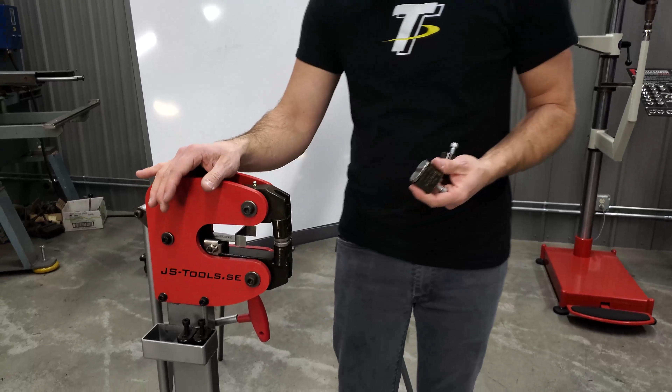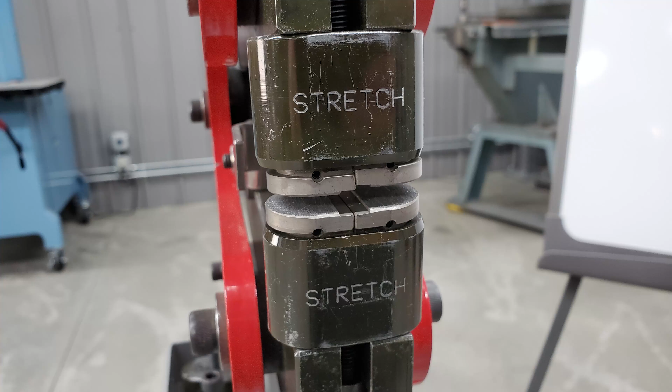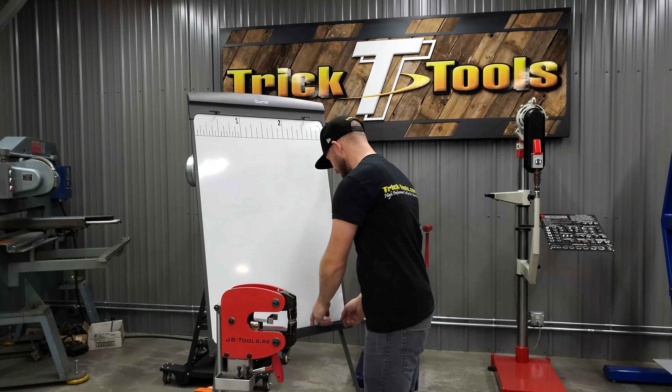So when you push on the foot pedal, it forces these two jaws together, and then the force of those jaws pressed onto the sheet metal that would go in between causes the jaws themselves to do whatever action they were built to do. So on a stretch jaw, I'm going to draw this on the whiteboard so you guys can see it with a little more definition.

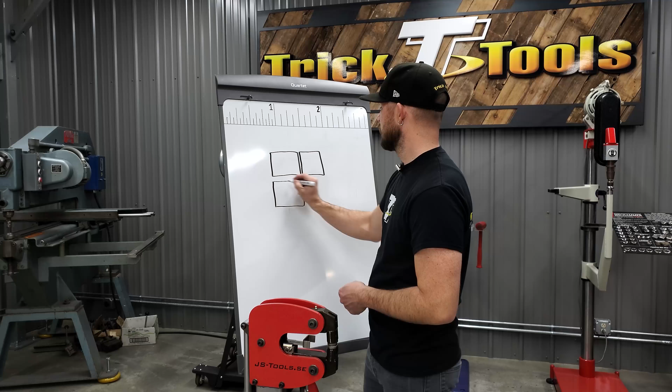So if you have, let's just say your jaw plates crudely look like this. So that's your upper jaw, and then you have a lower jaw here. Just drawing this crudely to get the point across. So on a stretching jaw, you don't really have a gap here - the jaw plates are together, side by side, on both top and bottom.

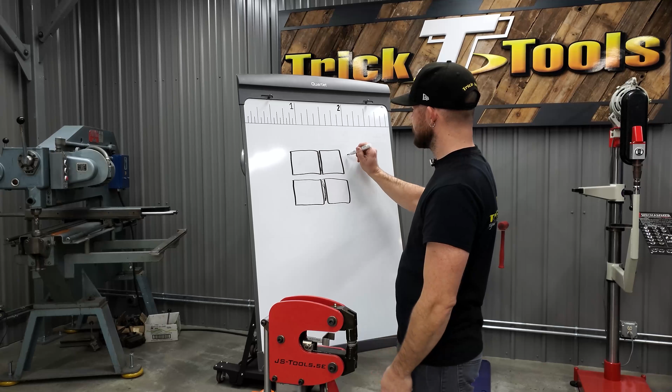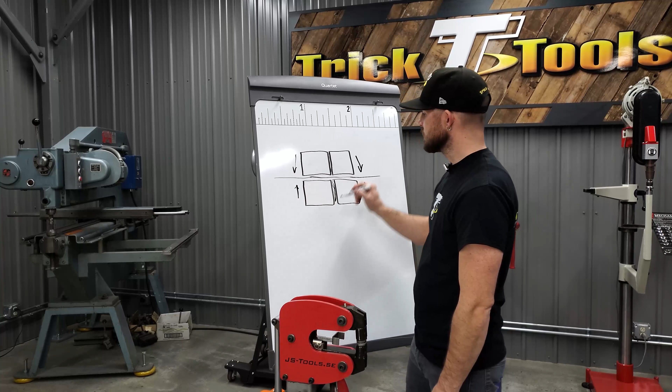And then as the jaws move up and down, you get the jaws coming together, and as they touch across here with the sheet metal, the way the jaws are made - and this doesn't matter based on what machine you have, this is pretty standard across the board.

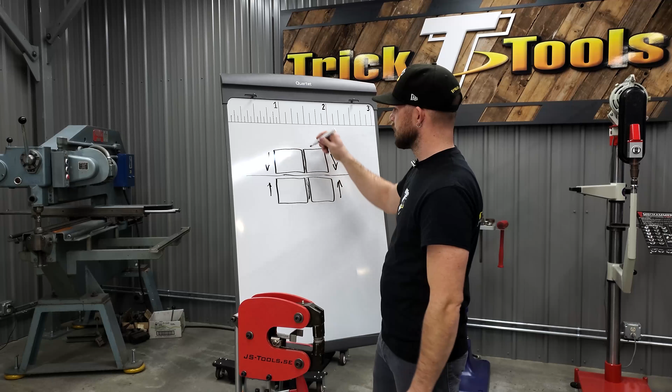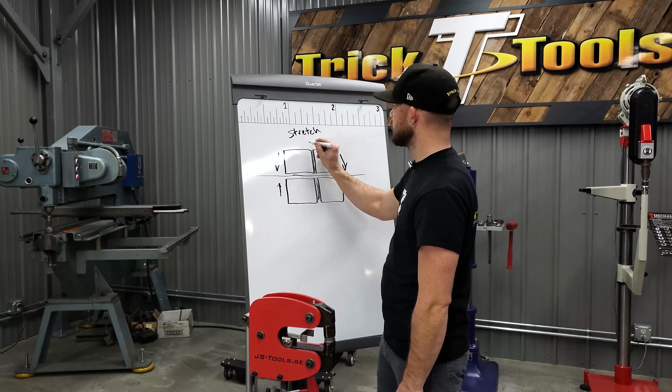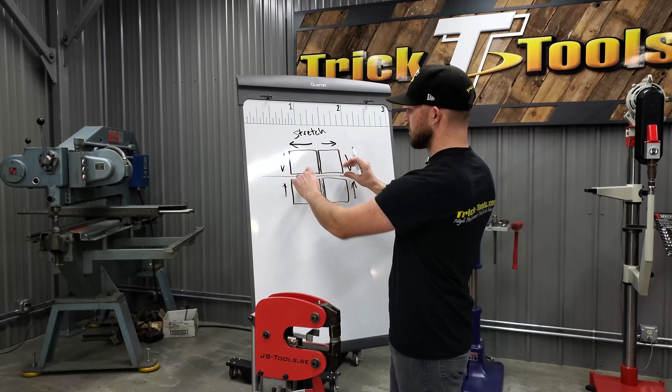These jaw plates internally are made to where when these come together, it forces on a stretching jaw - it forces each one of these jaw plates apart in this direction. So as they come down and pressure is applied in this direction, the jaw plates on both top and bottom are forced apart. And so what you have on your individual jaws - now this part can vary based on what machine you have.

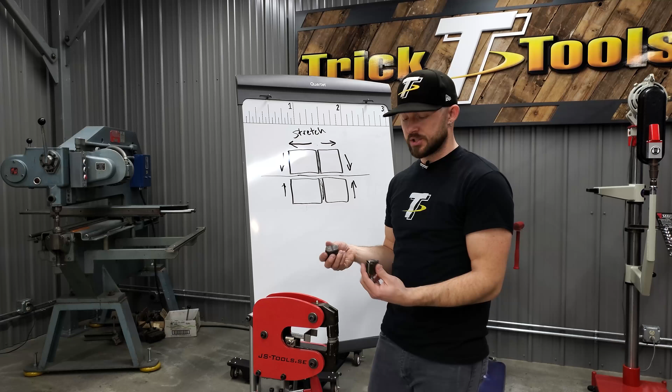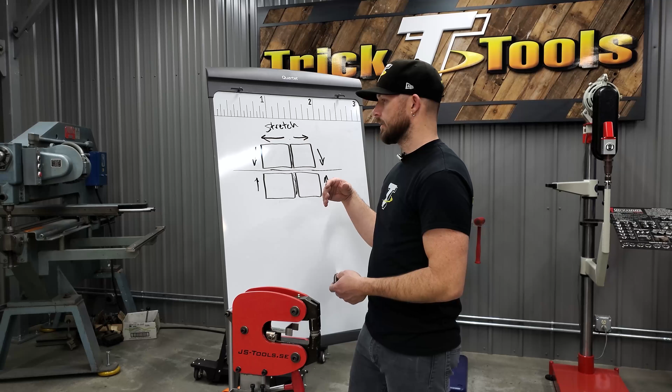So on this JS Tools machine, there's a certain type of texture or serration on the faces of each jaw. Different machines, different brands, all have different teeth marks or texture marks on the faces of the jaw so that when the pressure is applied, those grab the metal.

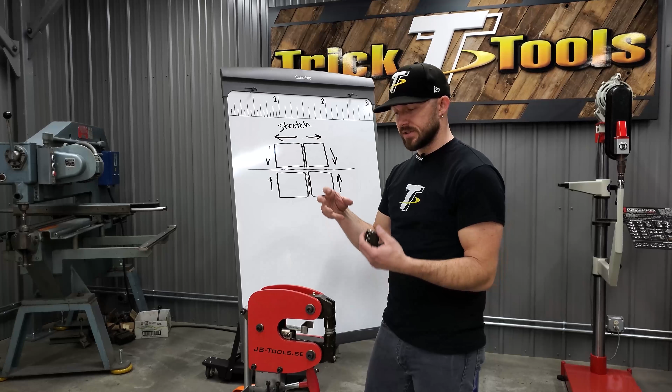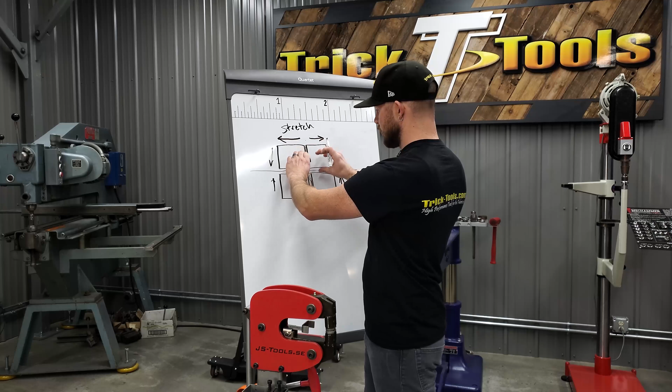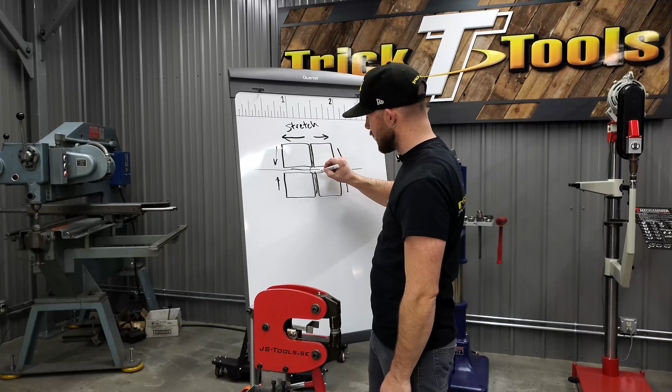And so as it grabs the metal, it pulls it. As it forces apart, it comes down, grabs the metal, and then it's forced apart, which then - on a stretch jaw, it is actually in this area right here where your four jaw plates come together. It's grabbing that and it's stretching the metal in that location. So it's going to grab the metal and pull on it.

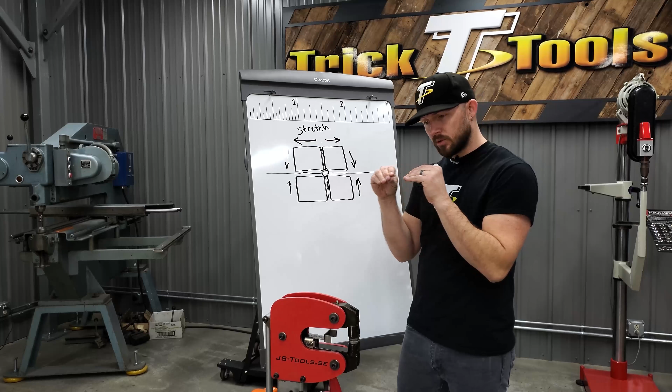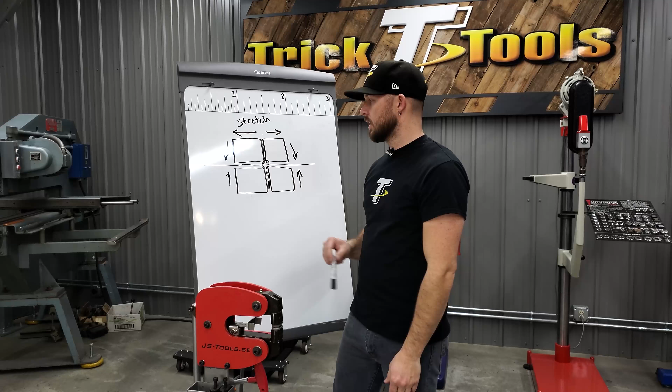So if you think of, let's just say you had some Play-Doh or some clay, something like that, and you rolled it out pretty flat, and then you grabbed it, even with your two hands, you just grabbed it like this and then pulled on it, and then you stretch it apart. That is essentially what is happening with this process here. So as opposed to hammering, where you're just providing an impact blow which smashes the metal down to create the stretch, this is physically grabbing the metal and stretching it to create that stretch.

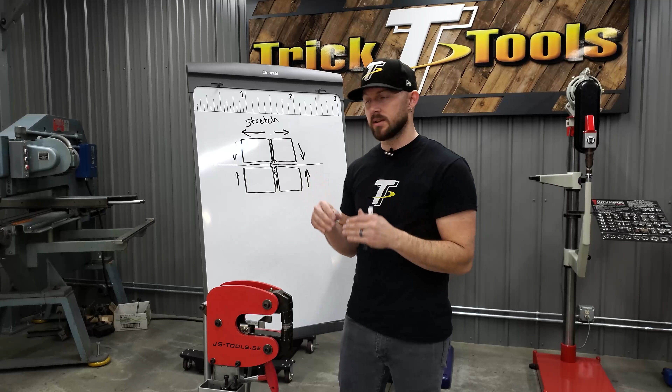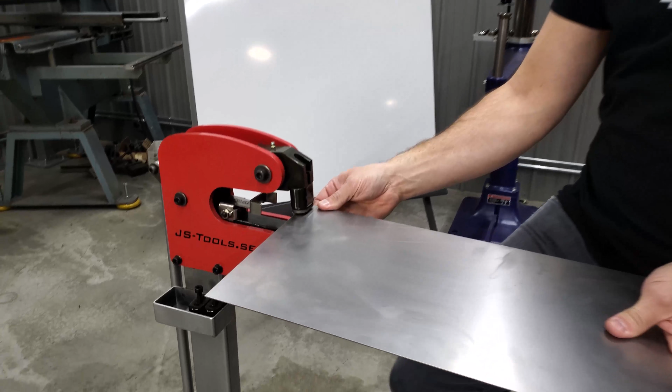So these stretch jaws in this JS machine here, like I said, to show you that if you put your piece of sheet metal in here, and as that comes together and you apply pressure down, the jaws come apart, and then you end up with a little bit of distortion in this corner now, and you can see where there's teeth marks here and here, and then there's an open space there.

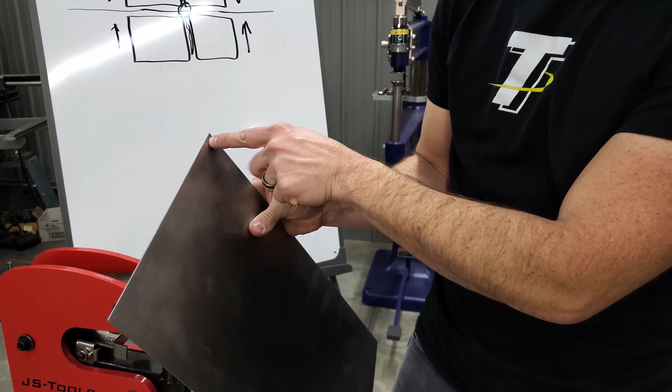So that's where the jaws came together, grabbed the metal, and they stretched it and pulled it apart. Now if you could measure this precisely, you would notice that the space in the middle, in between those marks where the jaws grab on both sides, is actually thinner than the material around it, just in that one spot.

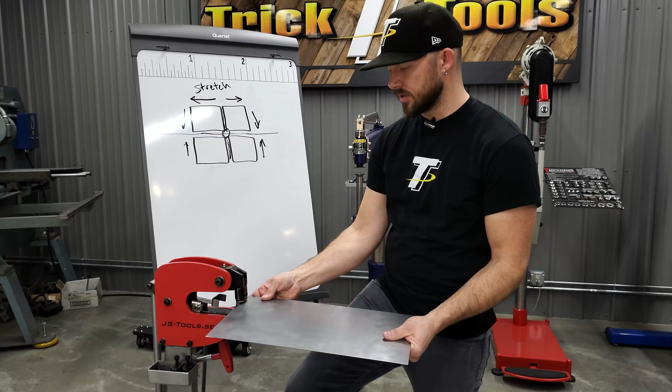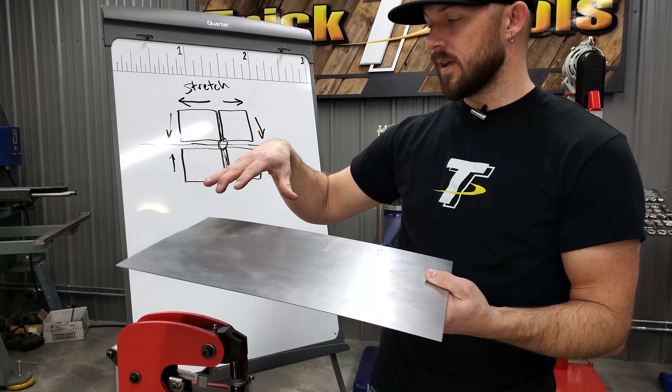And that's why as you go down the edge of a piece of sheet metal, and you do that a couple of times, then you really start to see some distortion, because whereas this was flat and in its natural state, now, because you've gone through and stretched down this edge, you've added more length of material in this distance, which in turn that material has to go somewhere.

So that's why you end up with little waves and stuff, because the material is trying to find a location that it's happy in and it's not loaded in any way.

So you can go down the edge of a piece of sheet metal, and you can also go in. So if you work your way in on a deep throat sheet machine like this JS, you can continue to walk the material in and then back out, and then you can actually see a line in the panel where it's grabbed and stretched apart down into the metal, and you have distortion deeper into the panel.

Now obviously the beauty of metalworking is learning how to use machines like this to learn where you need to apply stretch in order to achieve an outcome on a panel like this.

So now I'm going to explain the shrinking aspect of a shrinker stretcher machine and how it works. And so for starters, we'll draw this out.

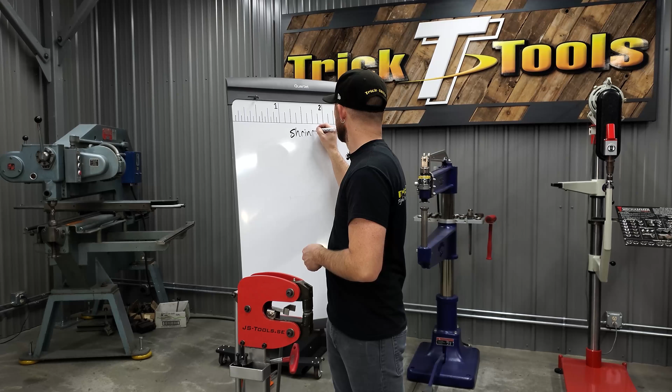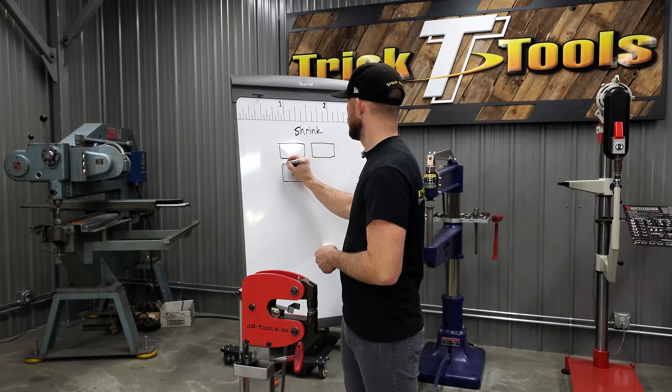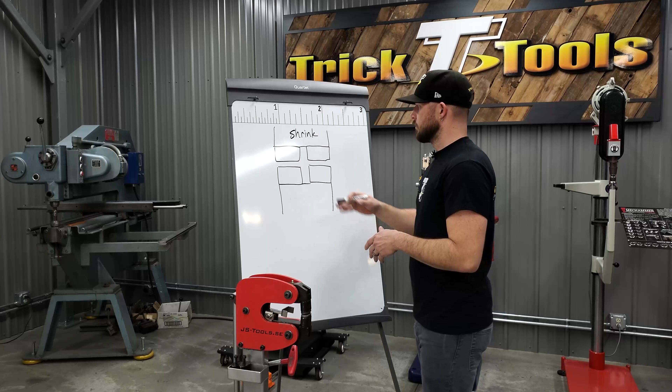So for shrinking, again, you have the jaw plates on your dies. Forgive my crude drawing, but you have your individual jaw plates that are on your jaws. Let's say this goes up this way, and so essentially with shrinking jaws, same principle.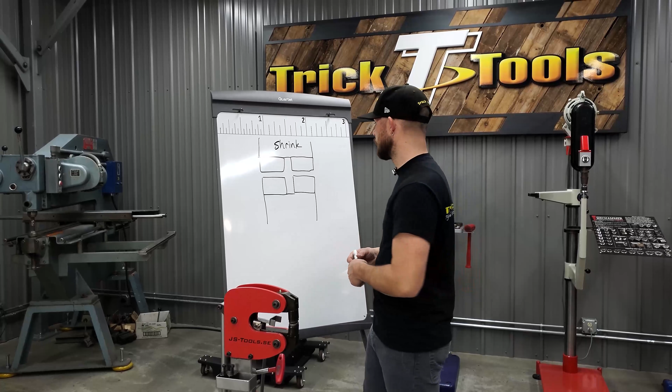Obviously the machine brings the jaws together. This is a foot operated machine. There are hand operated machines, air operated machines, and electric operated machines. It all depends on the level of work that you want to do and the capabilities of the machine that you need.

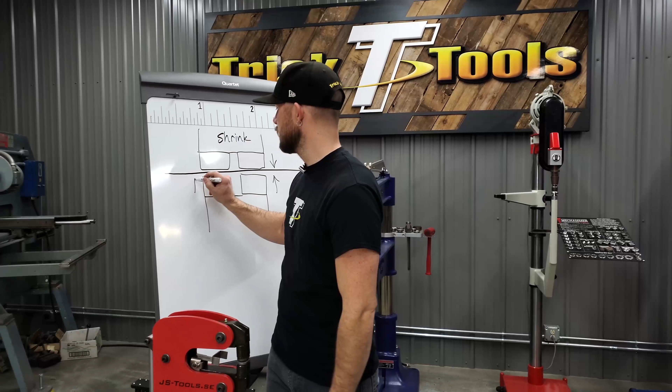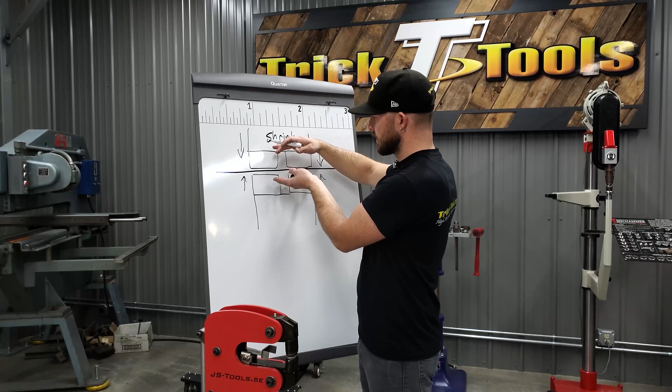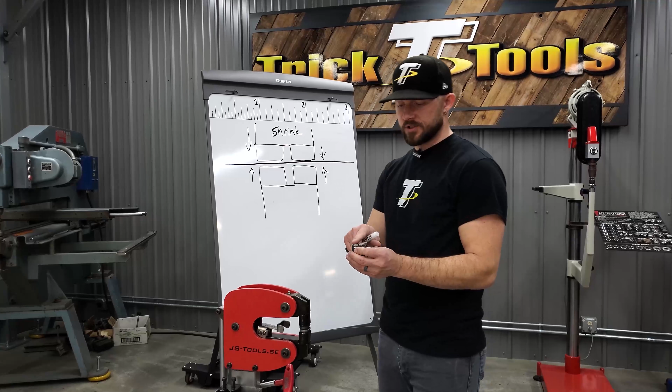So no matter what though, your jaws are coming together, and on a shrinking machine, if you have your piece of sheet metal in here, when these jaws come down and up accordingly, when they come together, the pressure of your foot or your hand applies that pressure to the jaws down on the piece of sheet metal. On a set of shrinking jaws, much like these, you have different serrations and ways of allowing the jaws to grip onto the sheet metal.

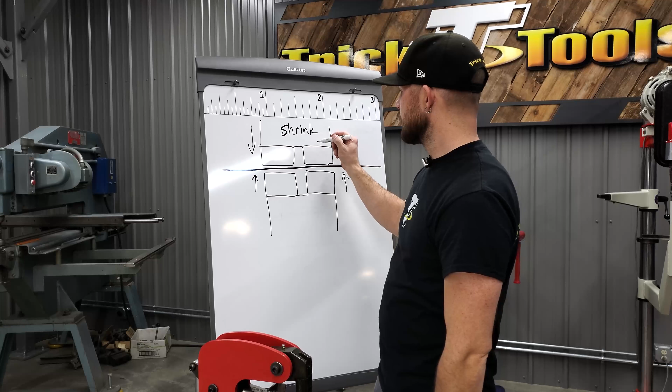And so as these come together on a shrinking jaw set, as that pressure is applied in this area, the jaw plates, because of the way that the jaws are made internally, are then pushed and forced in this direction, which, as these jaws come together, forces the metal together in this way.

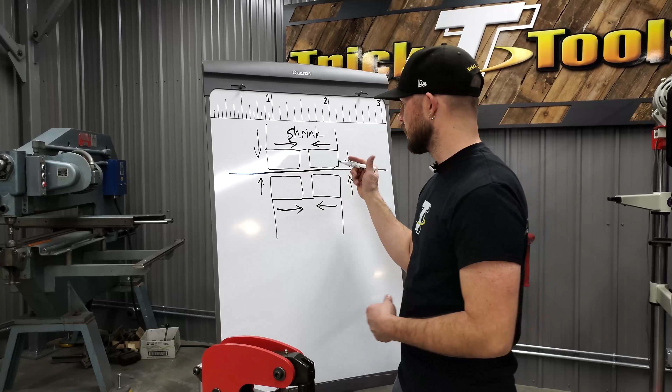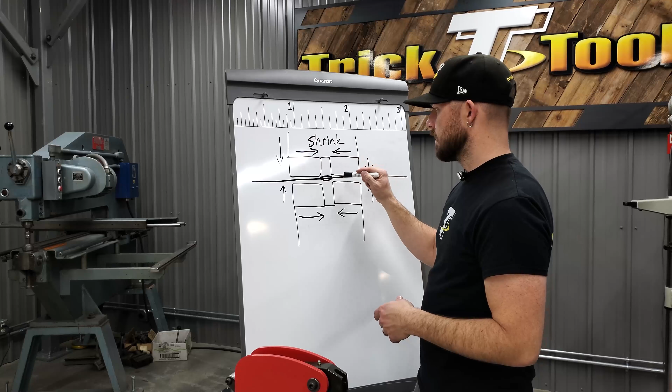So actually, if you were to look at it, if you were to do one shrink on a machine on a piece of sheet metal, you would see a little bit of an area in the middle that is actually a little bit thicker after you're done with the shrinking action. It's because this comes together, it grabs the metal and it's forcing it together, and what is allowing the metal to shrink is essentially kind of bunching it up.

It's forcing it together, and what's allowing it to do that is the gap in the jaws is pretty close together, so as it grabs the metal and forces it, there's nowhere else for the metal to go. Think of it like a paper towel when you're shrinking something. If you grab it too far apart, forcing it will just bend it. But if you grab it closer together, it bunches up in a smaller area, and that's exactly what's happening here.

For instance, on some shrinking tooling, we're going to use this side here. As you apply pressure down, the jaw plates are forced together after grabbing the metal, and you see a little deformation in the end of the panel. You can actually see, looking down the sheet metal this way, there's a raised bump right in the middle, because the metal has to go somewhere as it's being forced together. So anywhere between those jaws is being forced together, and you end up with metal that's physically bunched up in the middle.

So the more you do that, if you do it a handful of times down the edge of a piece of sheet metal, working your way back, essentially what you're doing is shortening the overall distance from this corner to this corner along the edge, because you're shrinking and pulling it together. But only where the jaws have grabbed and pulled it together does it shorten.